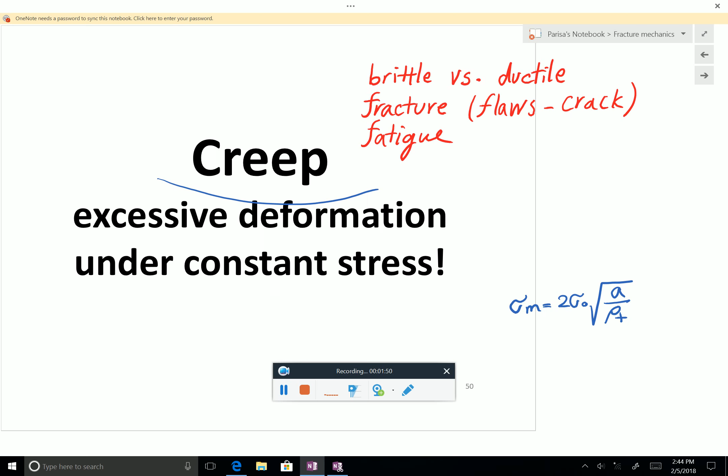This is a failure because of excessive deformation. What is very peculiar here is that the stress is constant. So what I mean by that: it turns out that if you have constant stress on some material, like a beam, and you don't change anything, the stress is the same, but after a while, the deformation starts to increase.

Even if the stress is completely constant, this phenomenon is called creep. So it starts very fast, then it has a stable regime, and then towards the end it becomes very fast, and then you have rupture because of excessive deformation. So we classify this as primary, secondary, and the third phase of creep, but we'll get to that later.

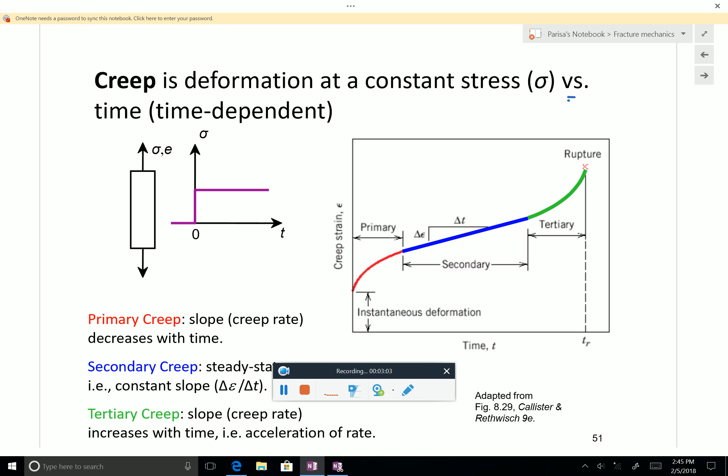This is a little bit strange because so far we didn't consider anything about time. Hooke's law doesn't tell us anything about time. The deformation is instantaneous - if you apply a stress, you expect to have a strain right away. So what is going on here? And some other strange things also happen.

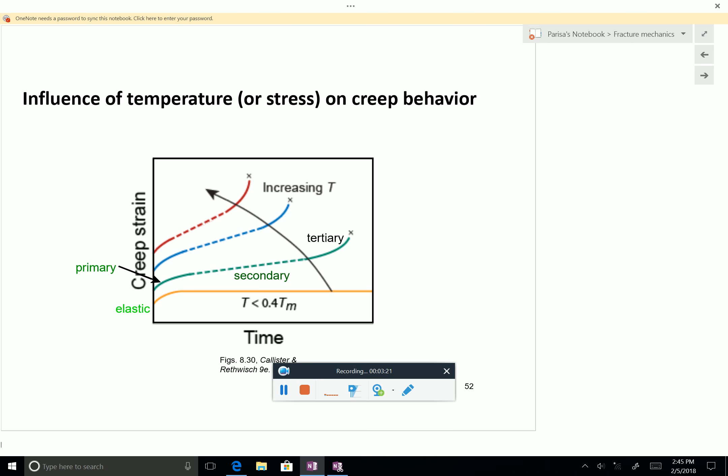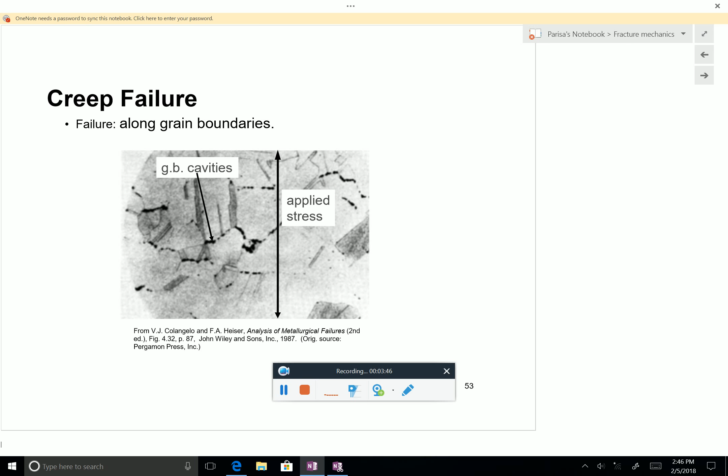For example, if you increase the temperature, the material deforms faster and breaks sooner. So it turns out that this kind of behavior we can't explain with what we know so far from Hooke's law. We have to learn about a new class of materials which gives rise to creep failure. And the failure, if you look at the grains, looks like you have micro cracks and then failure. But this happens over a long time, so it is basically time dependent.

So with this introduction, let's look at the new packet. It turns out that to be able to understand this phenomenon, we need to understand a little bit more about the mechanical properties of materials. And viscosity is the key here.

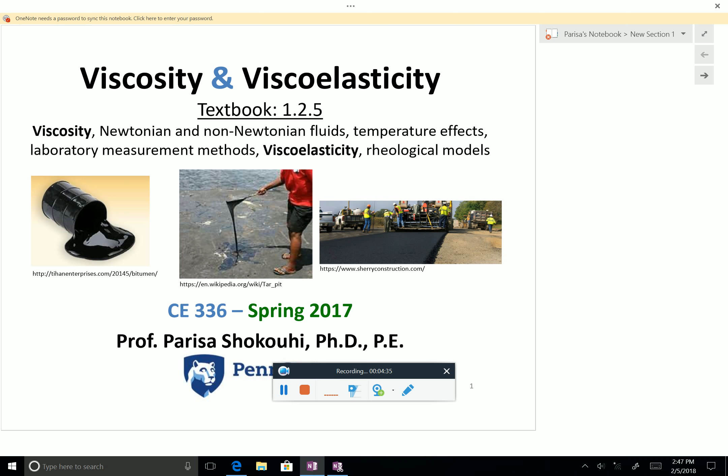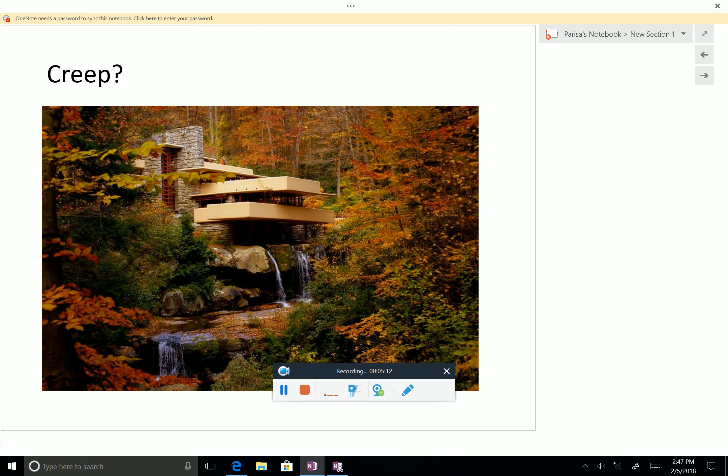Fallingwater. Have you been there recently, after you've been a civil engineer? Do you remember that towards the end of the tour, if you tour the facility, they say something about the maintenance costs and how hard it is, and they talk about all these concrete beams that are cracking. So it turns out this is, of course, a very beautiful building.

Who is the architect? Exactly. It's very beautiful, as you can see, and it is famous for these cantilever beams, which stand out and become a part of nature. But it also turns out that because it is under-reinforced, these beams have excessive deformation.

It is old. Does anyone remember in which decade it was built? The 30s? Exactly. And so over time, the beams have deformed, and because of this deformation, they all crack. So this cracking due to creep is a big problem in this structure.

So it has something always to do with time, and so far we didn't know anything about time. So far we were talking about Hooke's law, and we said that for linear elastic materials, deformation is instantaneous - there is no time component.

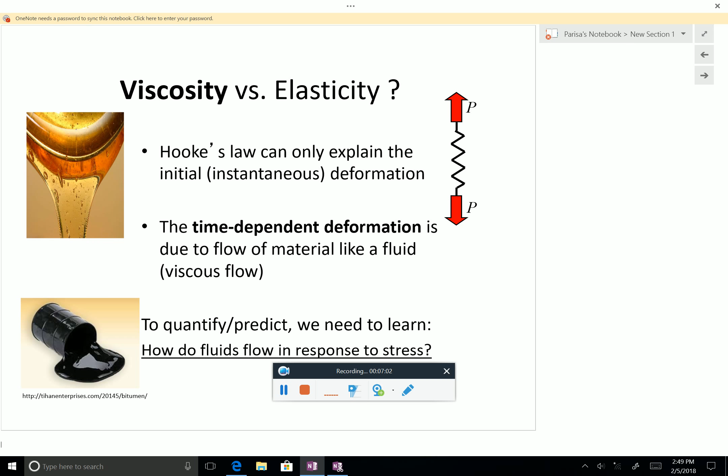So how do we explain this time-dependent deformation? It turns out that a lot of materials also have some sort of flow-like properties to them. They have some level of viscosity, and because of that, their deformation is also time-dependent. This is what we want to learn here. Before going and talking about viscosity, I want to review a little bit of elasticity, and to make the comparison, we can get to that later.

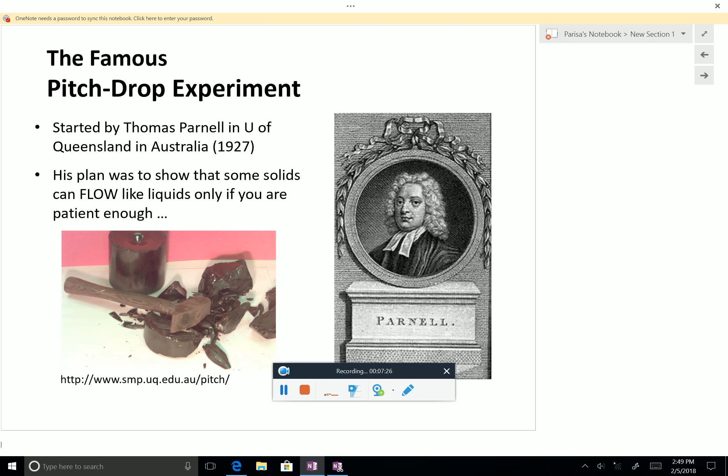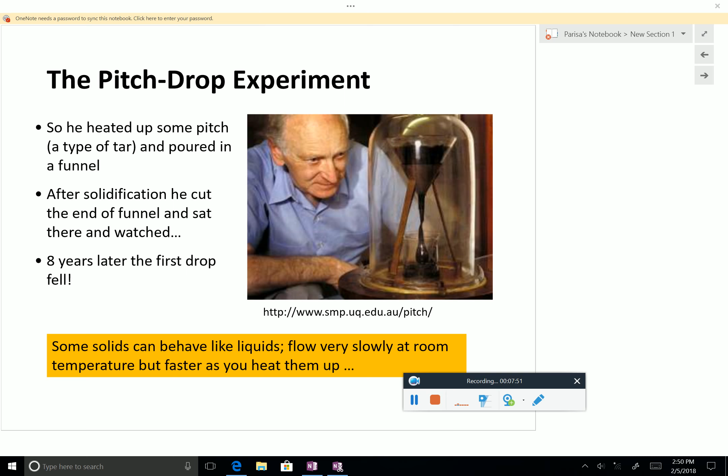One very interesting experiment is the pitch drop experiment. A professor in Australia wanted to show that even solid materials have flow-like properties. He had a lot of time, so he put a little bit of pitch, which is kind of an asphalt material, into a jar, and he just waited. His hypothesis was that even at room temperature, if you wait long enough, the solid will flow. And he was right—look at the duration. He started in 1927, 1930, and in 1938 finally the first drop dropped. So if you wait long enough, some materials will flow. He waited longer and longer, and you see that the solid, which looked very solid in the beginning, actually started to flow.

So most engineering materials are not like flows, but they are also not completely linear elastic. They are a combination, and they are called viscoelastic.

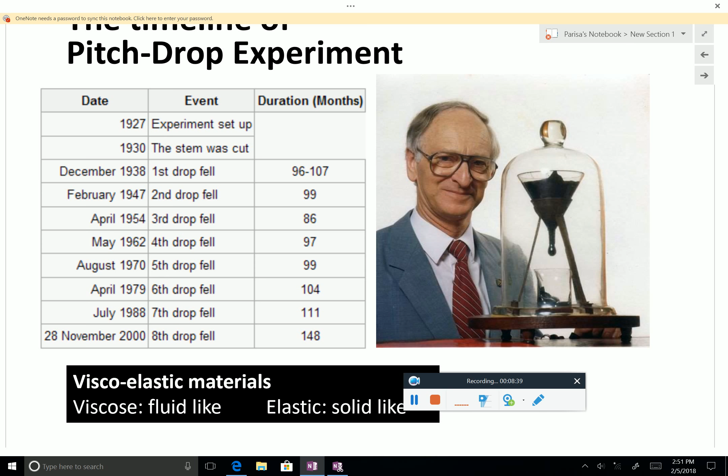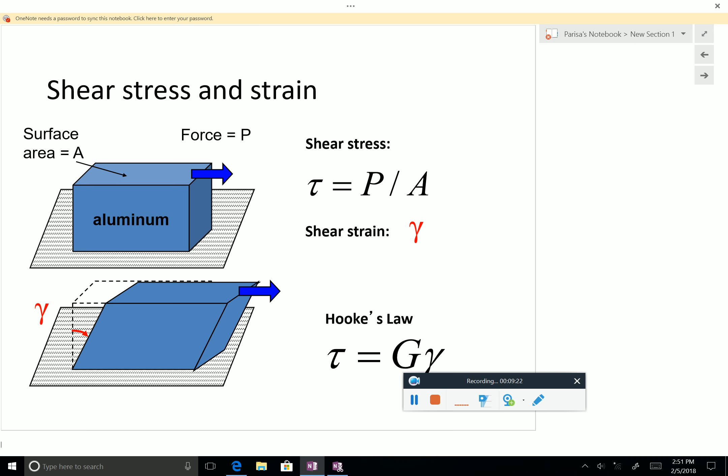So first we want to learn about viscous materials. We know about linear elastic materials, let's review a little bit. You have shear stress—you learned this. Shear stress is force divided by area parallel to it. And shear strain measures the change in shape, distortion, this angle, gamma. And if the material is linear elastic, then stress is proportional to strain: tau is G gamma, as we can see. This is Hooke's law.

What we know about linear elastic materials is that everything is time independent, and we have full recovery. We have talked about this before—if you have loading, unloading, everything goes back. If you plot stress versus strain, it's a straight line, and the slope is G.

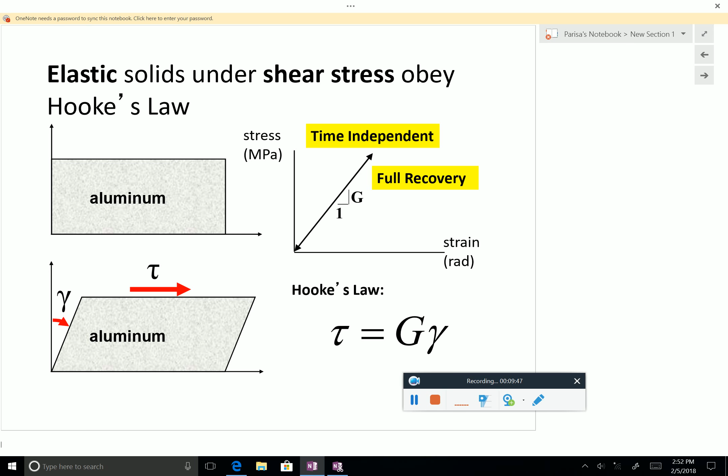Now, this is kind of important. So far we didn't talk about time. So what happens if you have a piece of linear elastic material and you apply, at some point—in the beginning there is no stress—at some point you apply stress tau, and then you remove it. Pay attention, the x-axis is time. This is something we are not used to—so far it's been stress versus strain. We are not used to looking at stress versus time. But imagine it's like that: until 2:30 p.m. there is no load, then there is a stress tau until 3:20, and then there is nothing. It's basically that. Now I want you to pay attention to how strain changes with time.

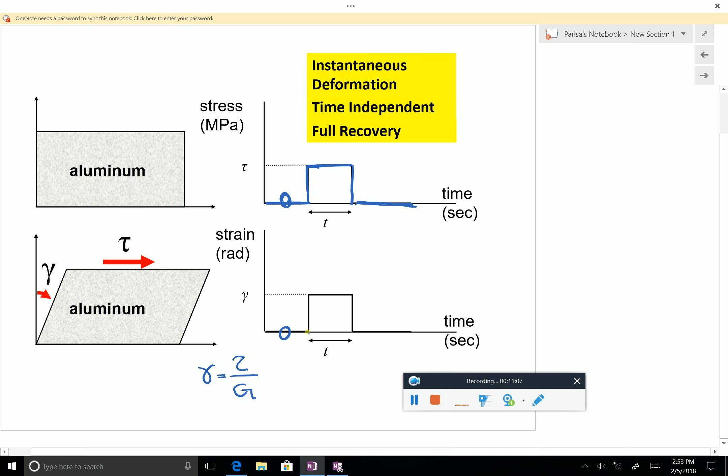You know that strain is proportional to stress, this we know. So if stress is 0, then strain would be also 0. The moment I apply a stress, strain will rise at the exact moment to the value gamma, which is tau over G—it's not any value, it is tau over G. This straight line, this jump upward, that is what I mean by instantaneous deformation. The moment you apply the force, at the same moment you have deformation. And as long as you have the stress on, the deformation is the same. The relationship is here.

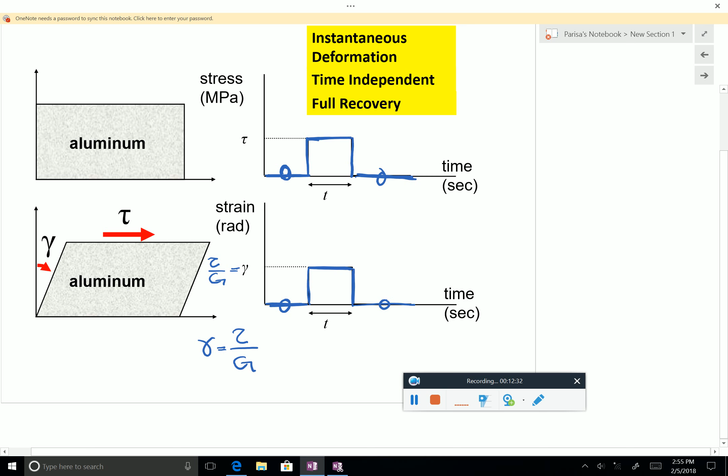What happens when I remove the load? Well, it instantaneously goes down, and when it is 0, then it goes back to 0. I know this looks trivial to you, but please pay attention because these models get more and more complicated. It's important to be able to talk yourself through drawing this strain diagram. Okay, so this is how it looks like. And the stress-strain curve, we have seen this always—it's a straight line, it goes back, time independent, instantaneous, full recovery.

One other thing I want you to pay attention to is a model.

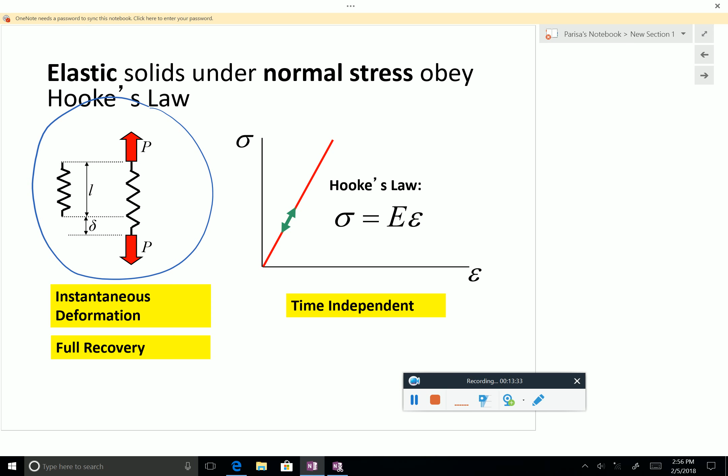You may have noticed that a lot of times, instead of drawing aluminum or concrete or steel, we represent it with a simple model of a linear spring. When I say linear, it means that the force and displacement are linearly related. This is a model for Hooke's law. It's a spring, you are familiar with it, you've seen this before. Again, the same thing - it's just repetition. You have instantaneous deformation, then it follows, and then it goes down. These are really repeating the same thing to make sure this is clear.

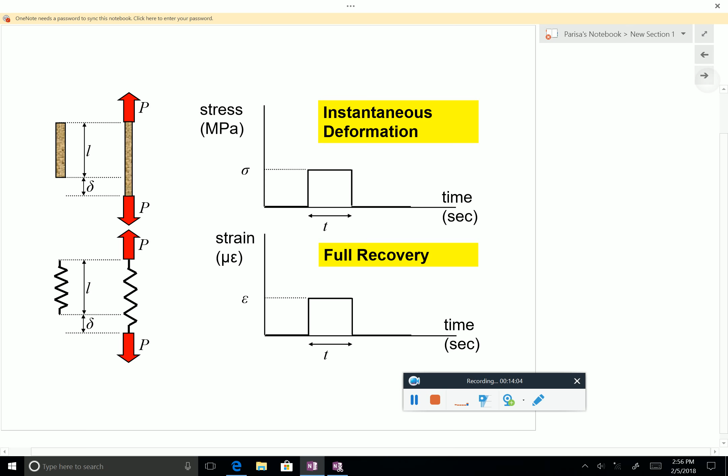Now, what happens if the material is not linear elastic? If you have a piece of caramel or honey, you apply the same force and you just wait, and you see that it's running. You've seen it when you want to put honey on toast - it just flows by itself, you don't have to do anything, you just wait a little bit and it flows. So you apply the same force, and if you wait, you see the deformation becomes larger and larger. Depending on the material, if it's completely viscous, it's not going to go back. The honey doesn't - even if you take your spoon off, it's not going to take the form it had before in the jar. It's completely messed up because it's flowing. So it's very different from linear elastic materials.

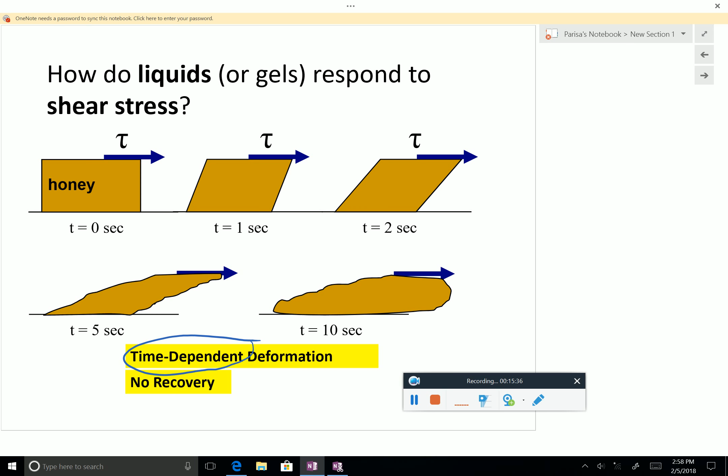You have time dependent behavior. Time becomes an important factor. Look here, 0 second, 1 second - these are, of course, cartoons. But there is no recovery. Look at this shape compared to where it was in the beginning - it's not the same. So it's a little bit different. It has this flow-like motion. The deformation becomes time dependent if the material is very viscous, and there is no recovery.

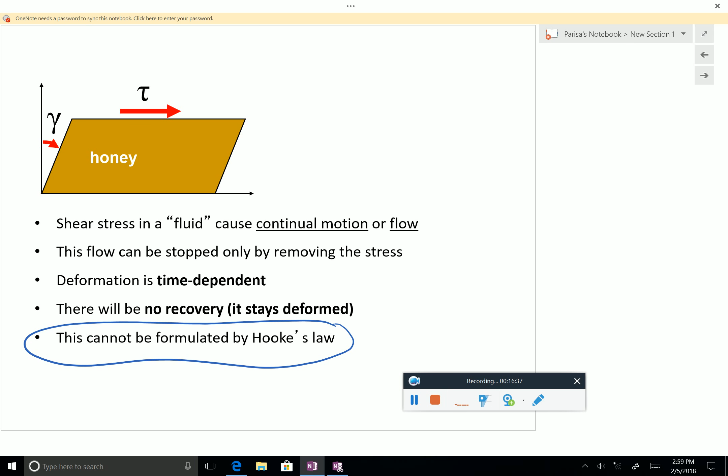What happens if you put a spoon of molasses or honey on the surface? It doesn't stay the same shape, it starts to move, right? And it doesn't go back even if you're not doing anything to it. So, most importantly for us, and that's what we want to learn, how do we describe this? Now Hooke's law completely falls apart. We can't use sigma equal to E epsilon anymore. This is a different kind of material, so what do we do?

It turns out that people have learned about this a long time ago and have developed models to understand them as well. So one class of viscous materials follow the so-called Newton's law - so like Hooke's law, we have Newton's law. What does it say? We used to have stress versus strain. I draw here, just for comparison, we had linear elastic material, stress versus strain, and it was linear, and this slope is G, exactly, shear modulus.

Newton's law, Newtonian physics: stress is proportional to the rate of strain. So that is the rate of change of strain - how much is the strain changing over time? In 1 second, how much is it changing? So it's different. Newtonian fluids show a linear relationship - there is a linear relationship between stress and rate of strain. And this dot on top of gamma is like the derivative with respect to time.

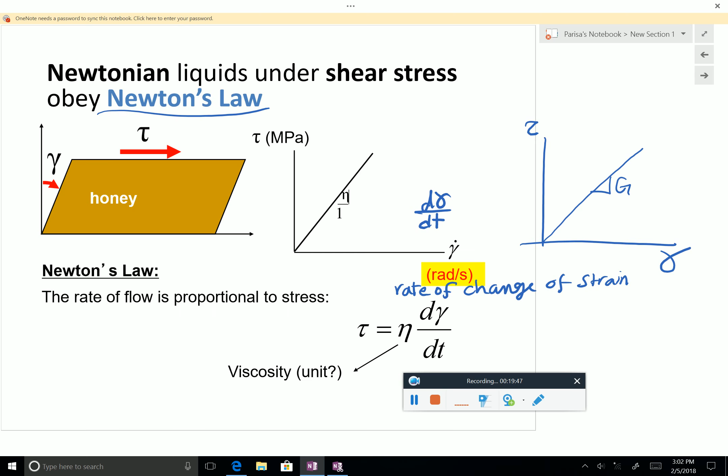A little bit later. So,

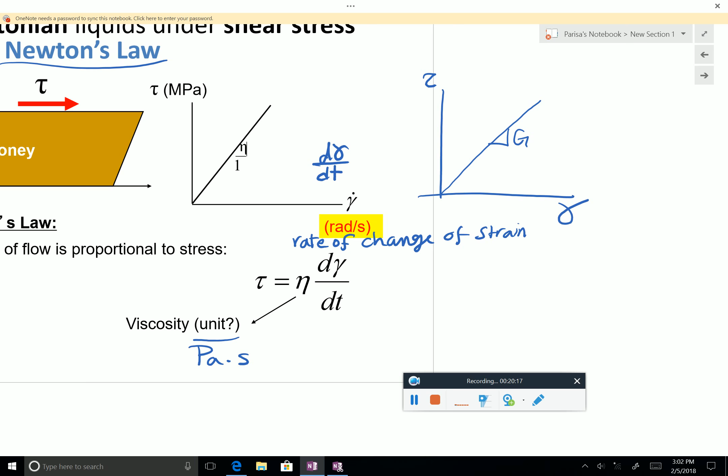Now we want to understand this a little bit better. We learned that, maybe it was too fast. So the unit is the unit of a stress times time. Gamma doesn't have a unit, so it would be the unit of a stress times time. So Pascal second, or it can be PSI second. A strange unit, but this is what it is.

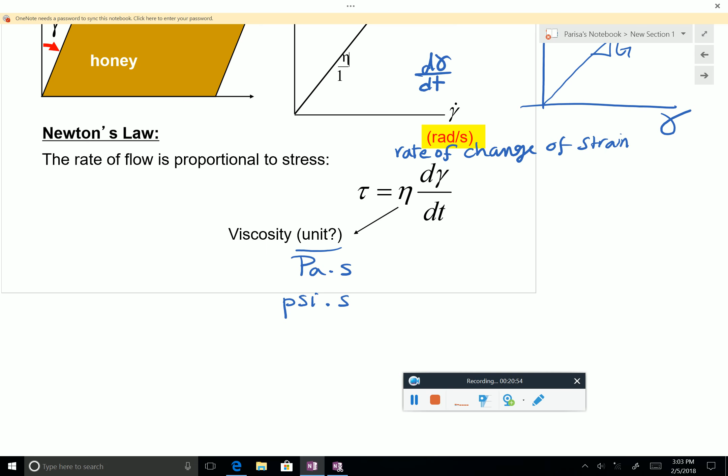Now we have to also find a way. Before it was easy. We would say, okay, tau is equal to G gamma, so gamma is tau over G. Everything was easy. Now it's a little bit more involved.

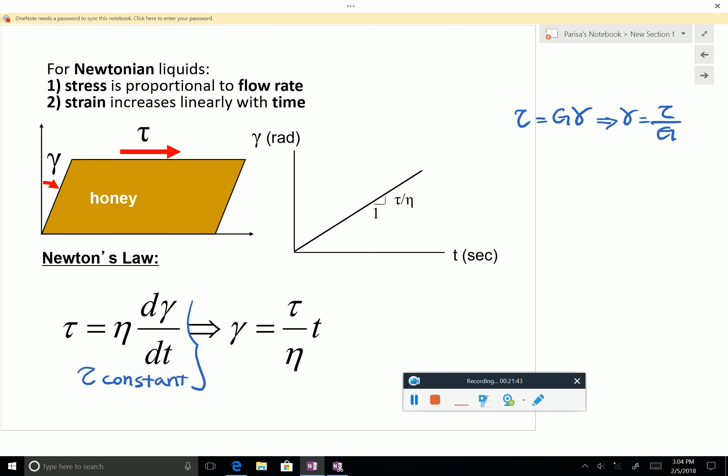This is Newtonian fluid. We learned that stress is proportional to the rate of a strain. Now, if a stress is constant, then gamma will be increasing linearly with time. Right? So how do we know that? You can look at the rate of change of gamma and see, okay, it is tau over eta. Now, if this is a constant, it means that if you plot gamma versus time, this will be the slope.

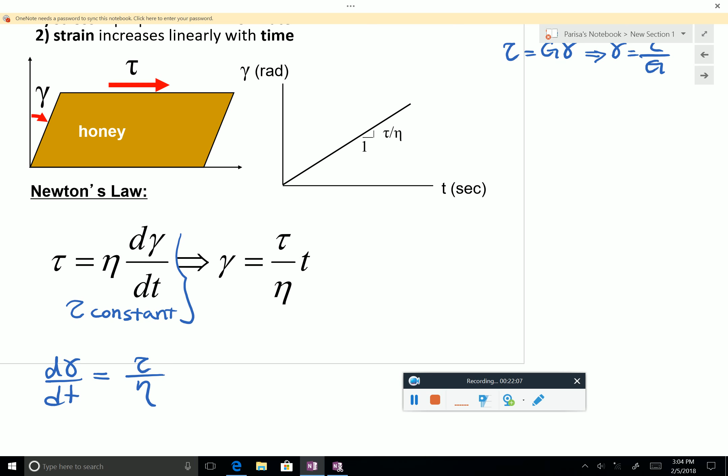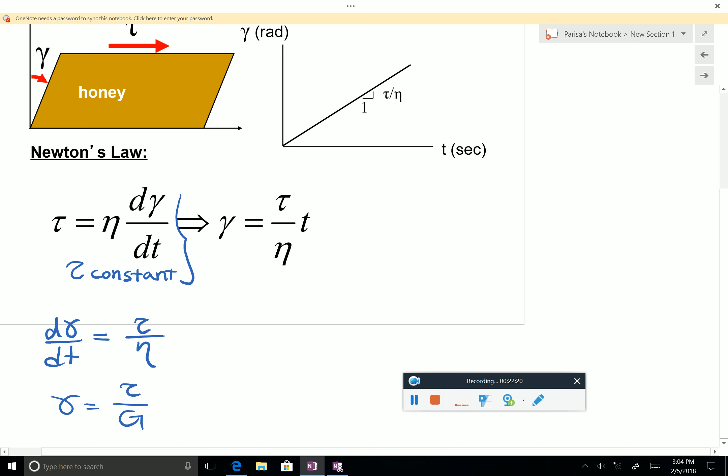So it is equivalent in a way when you say gamma is tau over G. It's similar, something similar to that, but we have here T. So here we are looking at how the strain is changing with time. It's increasing with a slope.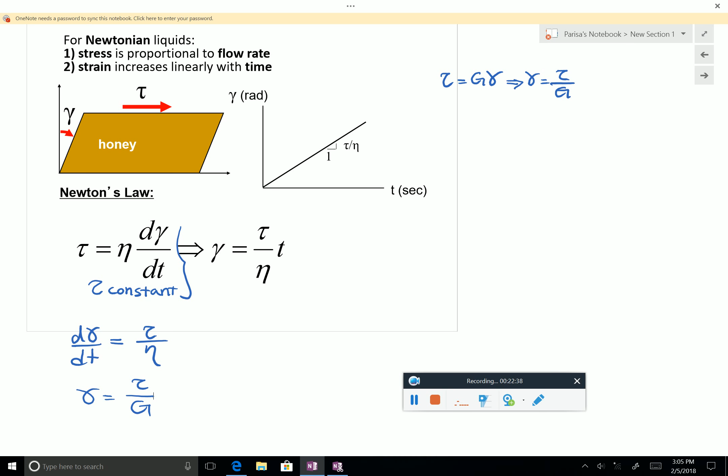Now, it becomes interesting. Now the next question is, what happens when we apply a constant stress to a viscous material?

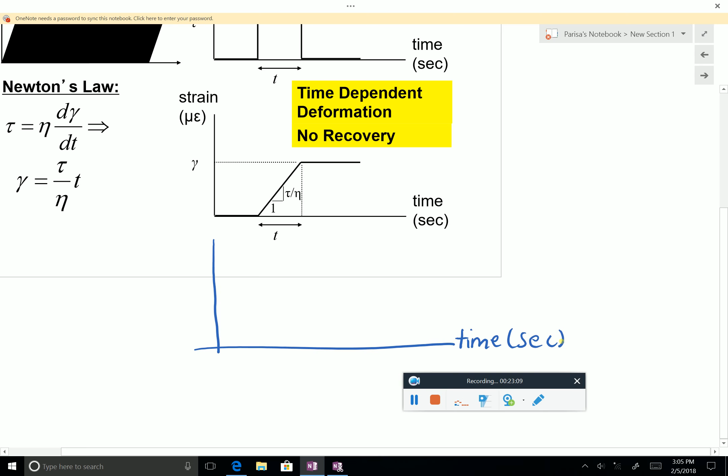Before explaining this, let's just do for practice what I showed you before. Let's first consider this stress versus time on the top, and for yourself, draw a strain versus time if the material was linear elastic. I did it a few minutes ago, so try to forget about this graph for now. If it was linear elastic from that stress, how would you go to strain? And try to plot it.

Just as we did before. So we apply constant stress at some time. First there is no stress. Then I apply stress tau, and then I take it away. I want to see if it was linear elastic, how would the strain versus time look like? If possible, try not to look back at what we did before. Try to do it for yourself.

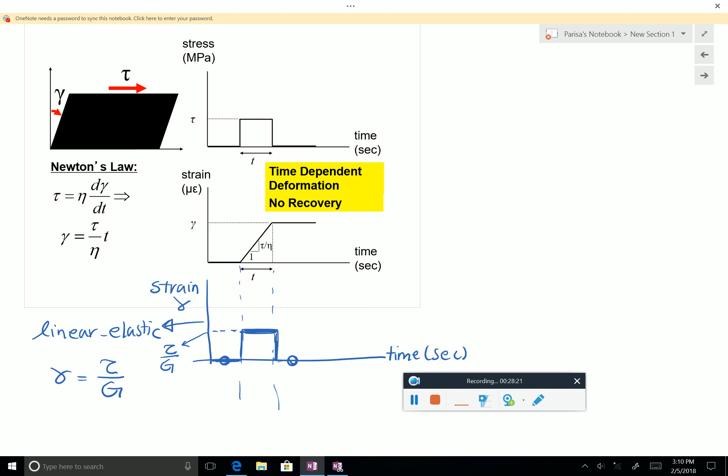That's what it is. Now what happens when the material is viscous? Like here. So here, what we know is that the rate of a strain versus time, so the change of a strain is actually equal to tau over viscosity.

If you have nothing in the beginning, 0, and you don't apply any stress, this will be 0. So 0 is 0. There is nothing here. Here is 0. You start from 0. So if you start from 0 and the rate is 0, it remains 0. Makes sense? So the rate is 0 actually. But since you start from 0 and nothing is changing, 0 will be 0.

Now, what happens when I apply the stress? When you apply the stress and it is constant, with time, you are going to have a constant slope. This is what it says. It says the strain changes with time at a constant rate. That means it will be a line. Or you look at this equation. Gamma is a linear function of time. And the slope is tau over eta, stress over viscosity.

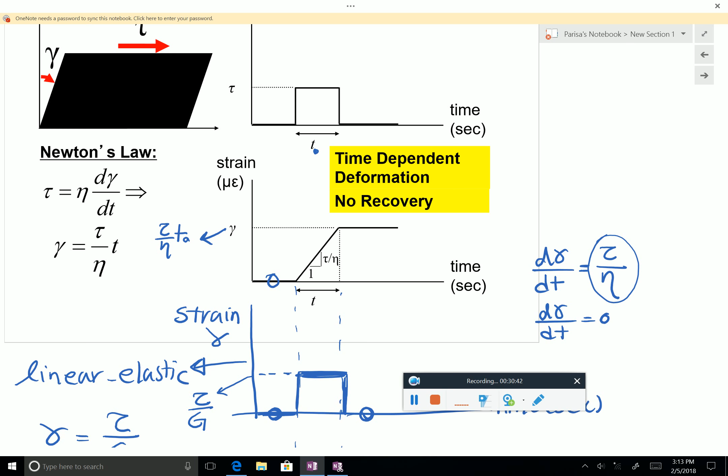If I hold it longer, let's use another color. If I hold this longer, what happens? It keeps going.

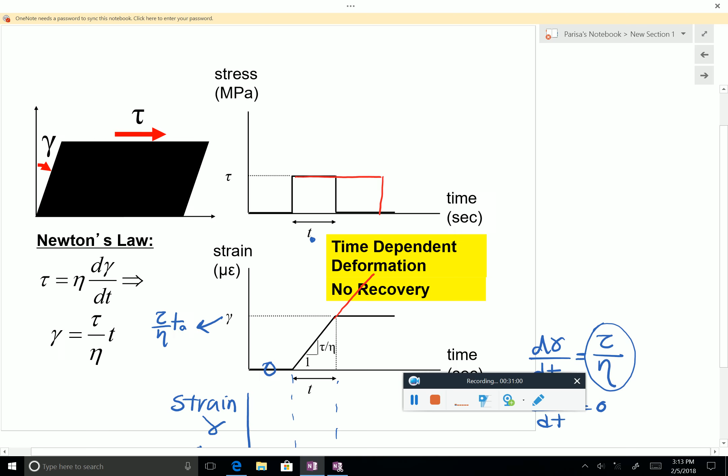The moment I stop, what happens? The moment there is no more force, the rate of change will be 0. That doesn't mean that the strain is 0. That means whatever it was, it stays like that. It doesn't change.

So wherever you reach, you stay there. You don't go back, because the rate of change is 0, not the strain itself. That's why at the end you see this horizontal line—because that would mean the rate of change of gamma with time is 0.

So you see here, if I apply the force longer—keep it on the girder in falling water—for how many years? Let's say almost 90 years. If I keep it for 90 years, the strain keeps accumulating. But if it was a linear elastic material, it didn't matter—it would still be the same level of strain.

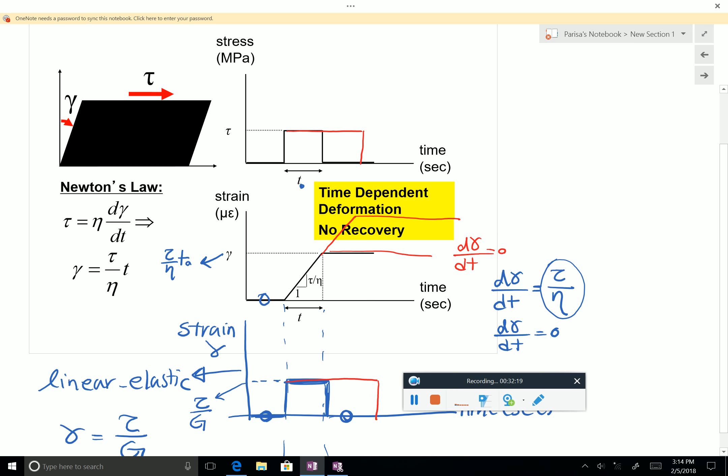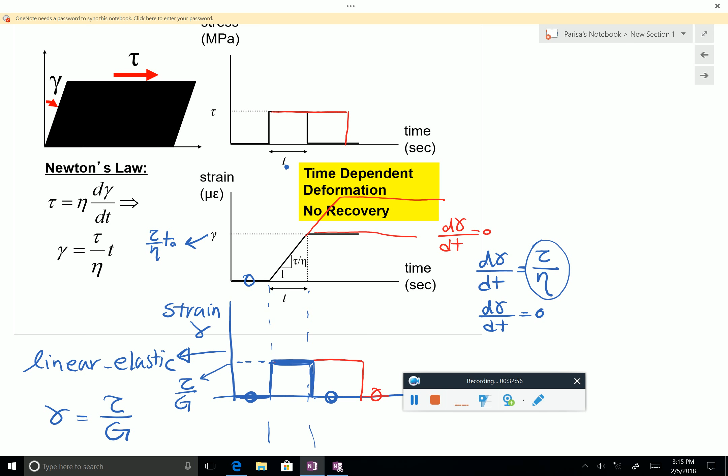Does it make sense? Do you see now this time dependency, what it means? Any questions? This is important because the other material models' building blocks are the spring and the dashpot, the viscous material. If you understand the spring and understand the dashpot, you can put them together to make complicated material models. Of course, concrete doesn't behave so simply, so there are more complicated material models, but this is one of the building blocks of that.

Quick question, it's also very simple, just for you to write a few equations and warm up. So it's a piece of asphalt—I'm using asphalt because it's something which is very obviously viscous stuff—and the shear stress is 1 kilopascal. You actually don't need these dimensions. You want to know what would be the shear strain after 5 seconds, given the viscosity.

Just take a few seconds, stop here, look at the equation, and try to write something down.

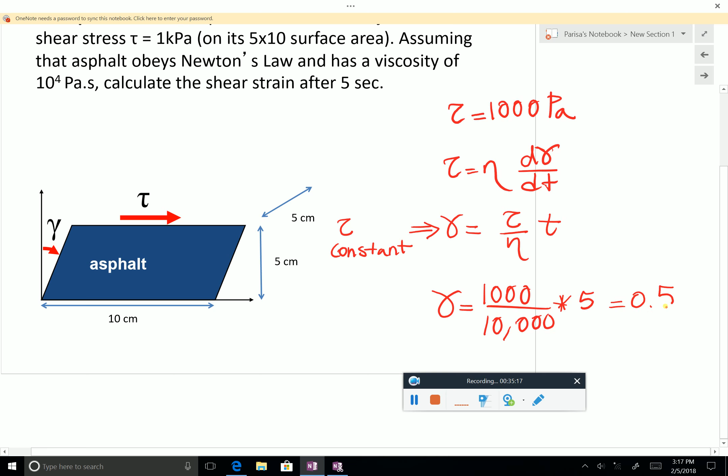If I had asked for 10 seconds instead, it would be larger. So the point I want you to remember is that in this type of material, everything depends on time. If you apply the same stress but keep it longer, you are going to get more strain.

I guess the solution is here if you have questions.